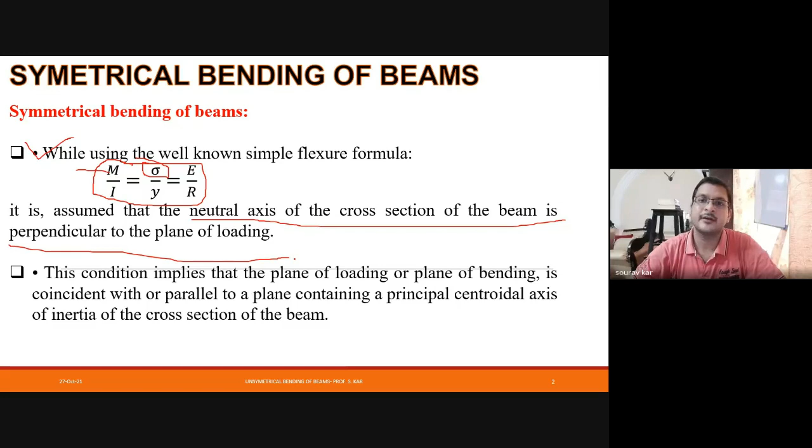If we have a rectangular beam, the neutral axis passes through the mid section of the cross section, and if the neutral axis is horizontal, then vertically, transversely, the loading is acting. In this condition, the bending equation is applicable, and when this bending equation is applicable, it is known as symmetrical bending.

That is which normally we have learned till date is symmetrical bending.

See the second point, this condition implies that the plane of loading or plane of bending is coincident with or parallel to a plane containing the principal centroidal axis.

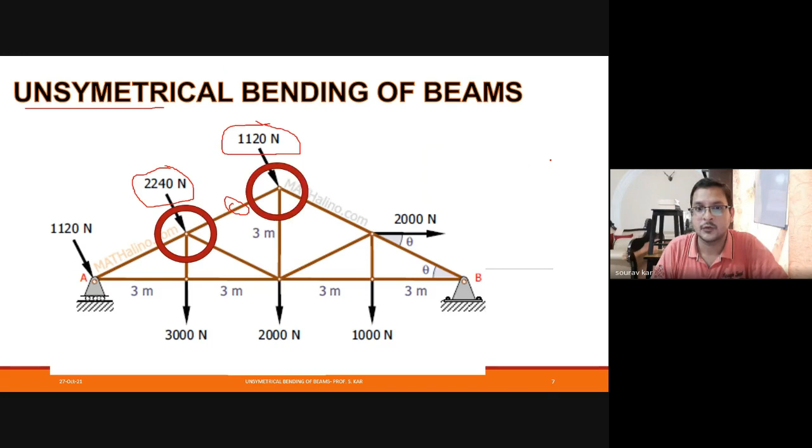So before coming to the statement, let us learn this thing, then we will come to the board. Unsymmetrical bending—what is the statement? For symmetrical bending, the plane of loading or plane of bending is either parallel or coincident with the x and y axis.

In unsymmetrical bending, just the opposite happens: the plane of loading or the plane of bending does not lie parallel to a plane that contains the principal centroidal axis of the cross section. Then the bending is called unsymmetrical bending. Another point: the direction of neutral axis is not perpendicular to the plane of bending.

Now let me come to the whiteboard. Let us learn the two statements, that is, the reasons for unsymmetrical bending. There are two criteria where unsymmetrical bending can take place—very important as far as MCQs are concerned. First, the section is symmetrical.

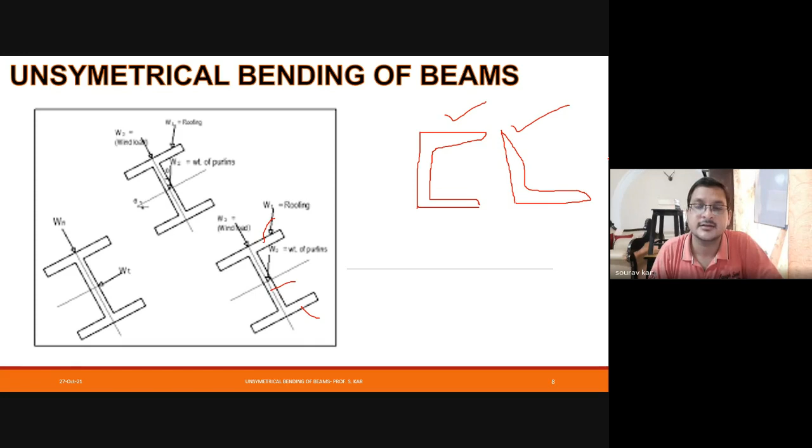So in all these cases, when the sections are unsymmetrical—if the load line is along the centroidal axis, meaning the load falls along x-axis and y-axis, but the section is unsymmetrical—then unsymmetrical bending takes place. So two important cases: the section is symmetrical but the load is coming inclined, then unsymmetrical bending occurs; or the section is unsymmetrical, like angle or channel section, and the load line is along any centroidal axis.

We will come to these diagrams later on. So these are the main criteria for unsymmetrical bending of beams. Now this chapter demands the basic idea to find out moment of inertia. Let us come to the whiteboard. Again, if required, I will come to the PPT.

Okay. It is very, very difficult to take online class also nowadays. Okay, is the board visible? Board visible, so? Yes. Sometimes when I will ask you, you have to respond. Okay.

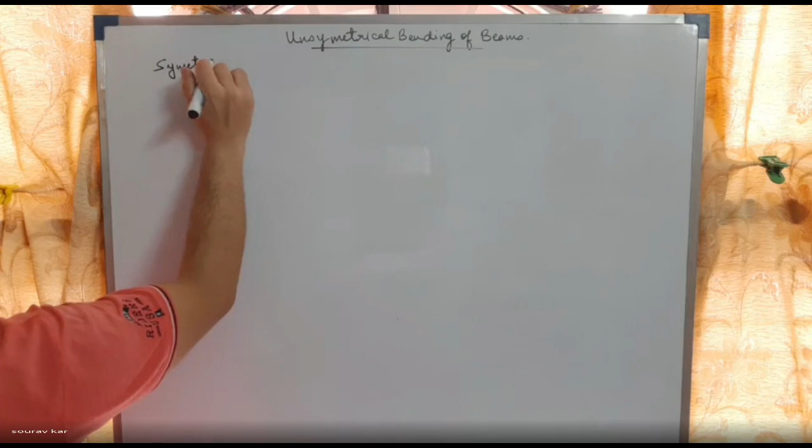So coming to this thing, unsymmetrical bending of beams. So we started, as I told you, there are two cases, symmetrical and unsymmetrical. I talked about the statements. Now I will show you in the figure how it is applicable, or what is the physical significance. Whatever I have discussed, that is in the statement form. Symmetrical and unsymmetrical bending. Okay. Now, what is happening?

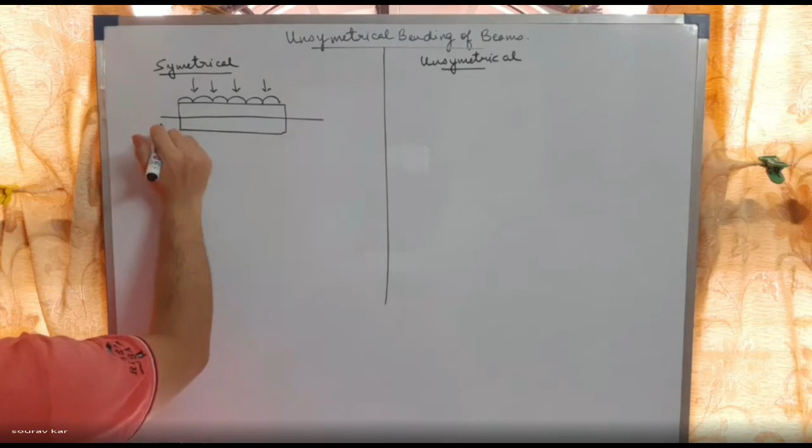For example, I told you the loading is acting transversely in this direction. For example, I have UDL or point load, something like this. Any sort of loading is there, and this loading is vertical loading, or you can say transverse loading. And I told you this is the neutral axis. What is neutral axis? Neutral axis is the layer of fiber where the compressive stress and tensile stress is zero. It is the location. So that is the neutral axis.

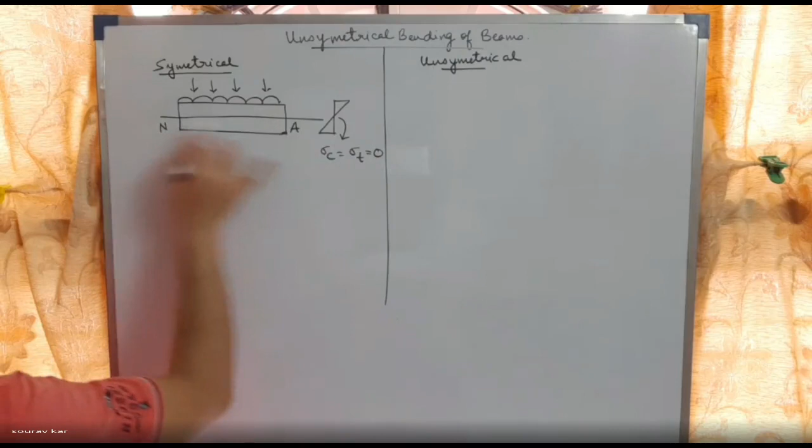Either the neutral axis lies or the neutral axis is perpendicular. First statement, the neutral axis is perpendicular to the loading, right? Second thing, that is the plane of loading. The plane of loading is parallel. For example, it is x axis and it is y axis. So the plane of loading is parallel to or coincident, means it is matching with this axis. That is, the plane of loading is parallel to x axis here.

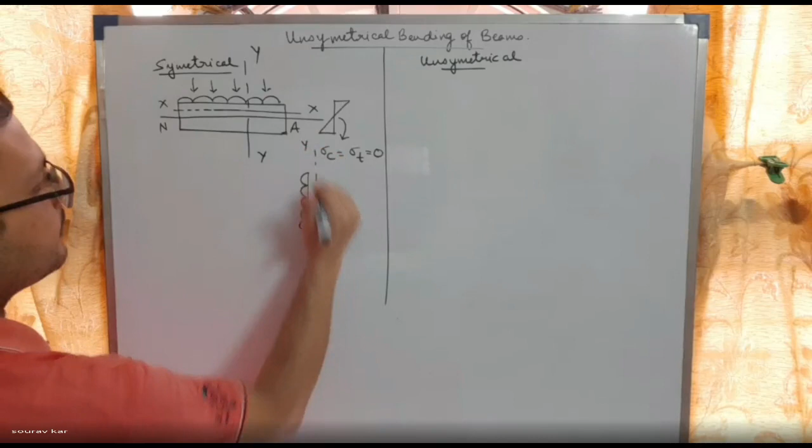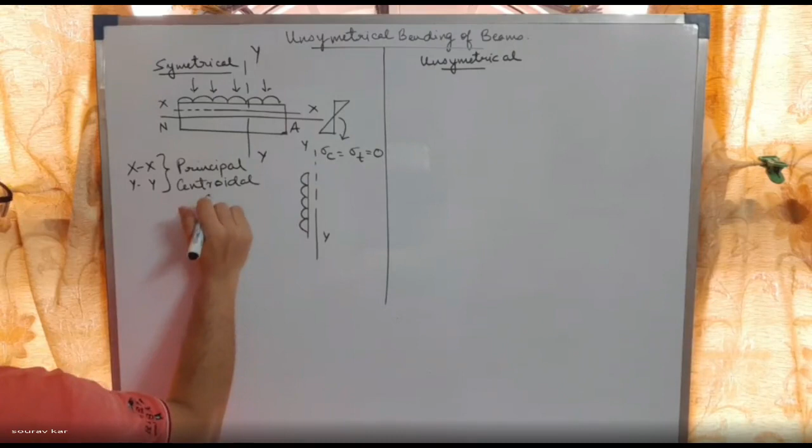For example, I have a beam like this and I have a loading like this. This plane is parallel to y axis. So here the plane of loading is parallel to x axis, and here the loading is parallel to y axis. So in symmetrical bending, the plane of loading is either coincident, matching completely, or parallel to x and y axis. So x axis and y axis are principal centroidal axis. Very important. In normal case, it is a principal centroidal axis.

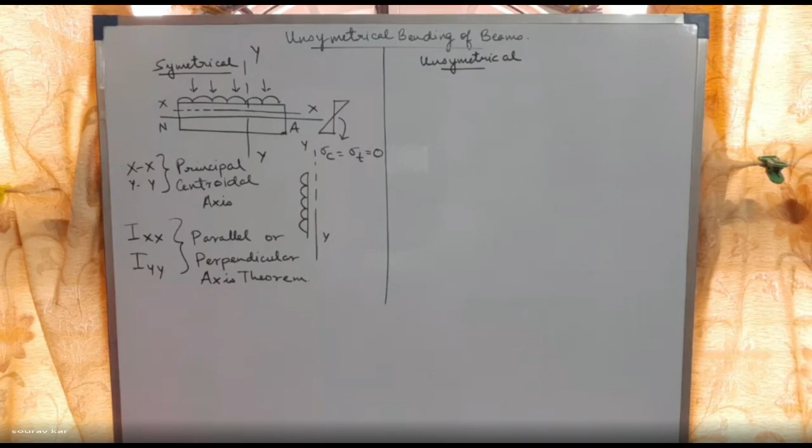Okay. Now, if someone asks me how to find out IXX and IYY, we use the principle of parallel or perpendicular axis theorem. Okay. And what is IXY? IXY is product of moment of inertia.

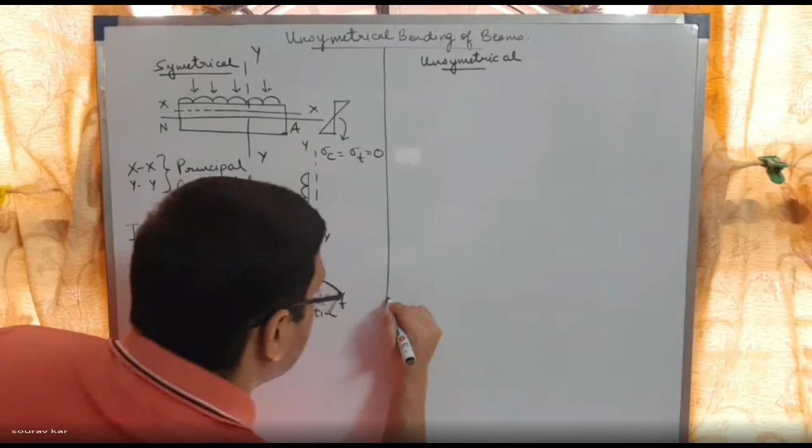So IXX is the principal moment of inertia about x axis. IYY principal moment of inertia about y axis. IXY product of moment of inertia. So these are the basic things which we have learned in symmetrical bending. Now come to this side again. How we used to find out for parallel axis theorem. For example, this is my x and y axis, and I have a body. Any body, for example, this.

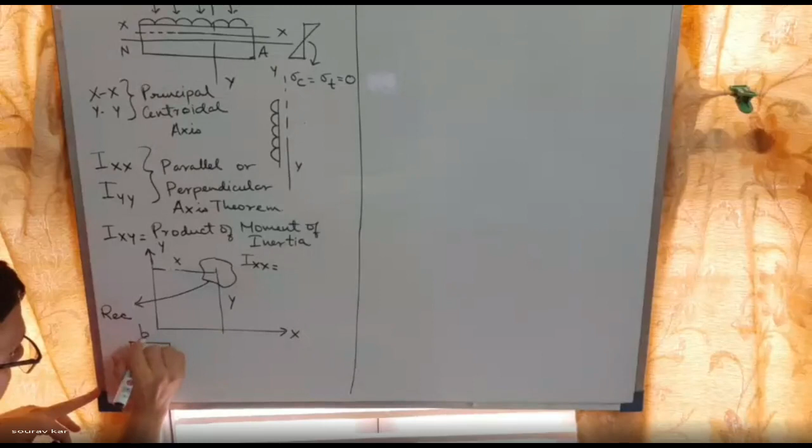If I have compound body, means which consists of two different bodies, it is attachment or superposition of two different bodies. Now, for example, I have a body. The location with respect to y axis, let us take x, and location with respect to x axis, let us take y. Distance from the centroid. So what is big IXX? For example, this body is rectangular. Width of the body B and depth is D. Let me take simple part.

So what will be this moment of inertia with respect to x axis? Now see, only calculating the moment of inertia of a single body, that means just a rectangle or triangle or circle, the moment of inertia for simple diagrams is given in the chart. In strength of material books, you can find it. But if you have compound body, that means a combination of two rectangles, three rectangles like this, then we have to apply parallel axis theorem.

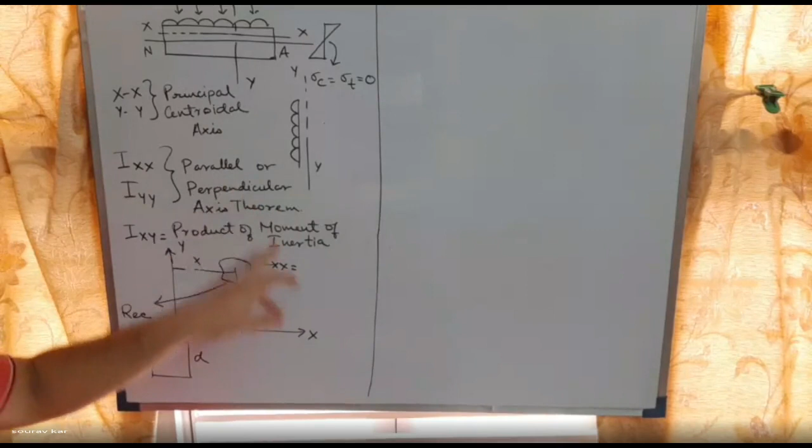Mainly we apply parallel axis theorem. It is easy to apply. That is why we apply parallel axis theorem. So what will be the formula for parallel axis theorem with respect to x axis, because we are calculating moment of inertia about x? So it is b, and d is the depth. So the basic formula is normal moment of inertia about xx plus area into distance square. Area into distance square. Okay.

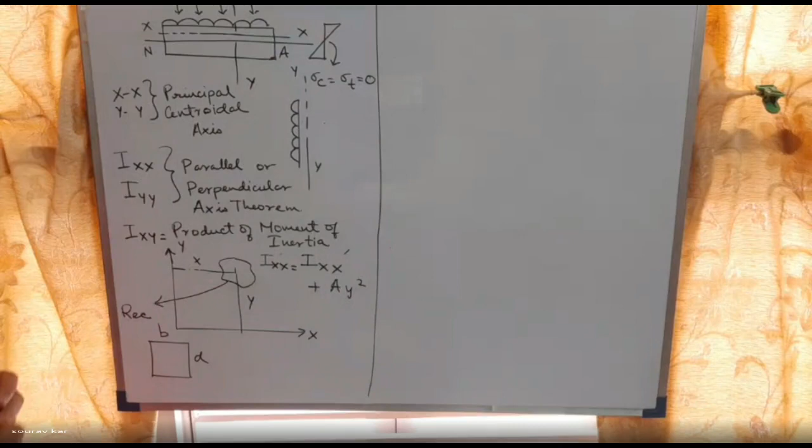That means, for example, let me take this body, and this body, like this. So I have three different rectangles. So the moment of inertia of one particular body will be the moment of inertia of individual body plus the area multiplied with the centroidal distance square. So this will be for Ixx, and similarly for Iyy, this will be moment of inertia about y axis plus A into x square.

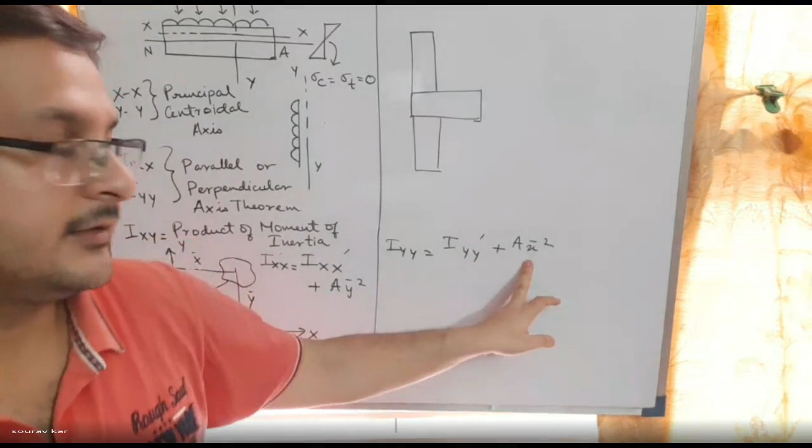So please remember this. Everyone knows it, but the second term everyone feels difficult. Moment of inertia with respect to any axis: area multiplied with the distance between the CGs. So here x bar, that means distance from x. So if you want to find out Iyy, that is the original moment of inertia of the body plus area multiplied with the distance between two CGs, CG of the whole body and CG of the individual body. When I do the problem, you will better understand.

So please everyone make sure to at least remember three moments of inertia: the moment of inertia of rectangle, circle and triangle. Three basic figures you have to remember for lifelong. So BD cube by 12. For example, let me take a rectangle. So it is x axis. So moment of inertia about x axis is B into D cube by 12.

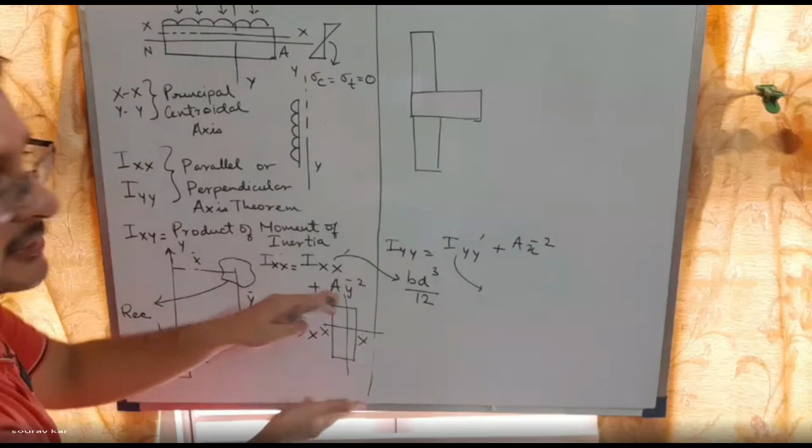If I take it along y axis, B will become D. So x axis is horizontal, B into D cube by 12. When you take it about y axis, because y axis is perpendicular, just change your face. So B becomes D, D becomes B. So DB cube by 12. This is the basic moment of inertia of individual bodies. Always remember. So this is how we find out Ixx, Iyy, and how to find out Ixy I will show. These are the things which we have learned in symmetrical bending. Now coming to unsymmetrical.

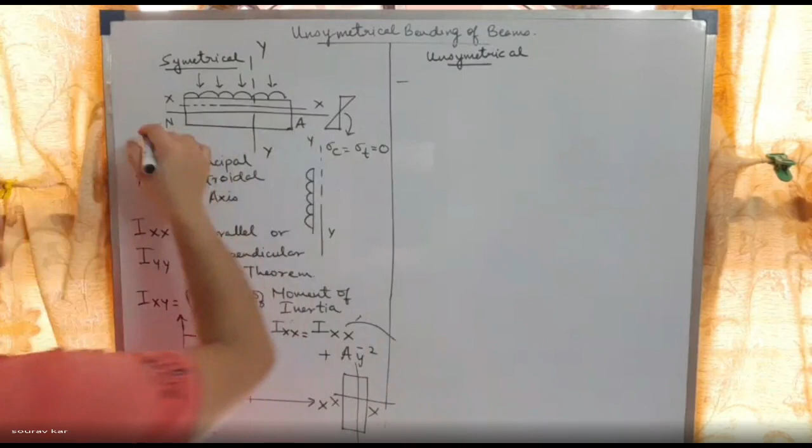In unsymmetrical bending, I already told you that the plane of loading does not coincide. So, for example, I have an inclined plane and I have a body like this. So, what will happen? These are x and y, the principal axes. Now, two things can occur.

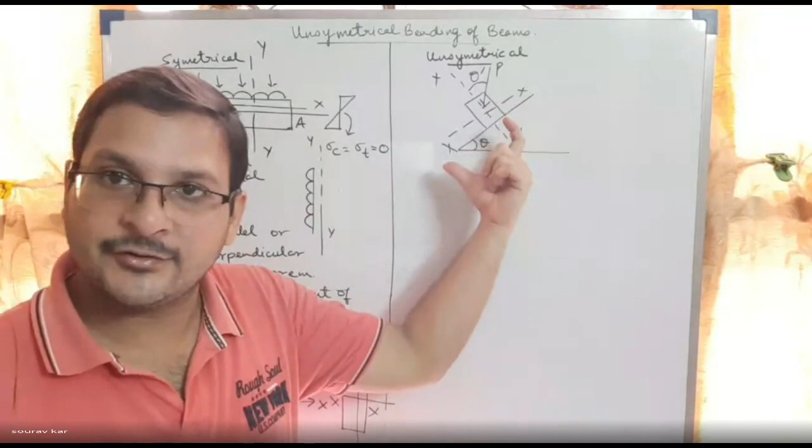Either the body is symmetrical and the loading is applied at an inclined angle, for example, some angle theta. This is one case. The body is symmetrical, even if the body is inclined, no problem, or the body is lying horizontal. Then also, if the loading is inclined, we will have unsymmetrical bending. Or the body is not symmetrical, like this, an angle section.

Then also, for example, the bodies along this direction, the body is either parallel or coincident with x and y axis also. Due to this, it is unsymmetrical about x and y, no symmetry. Then it will undergo unsymmetrical bending.

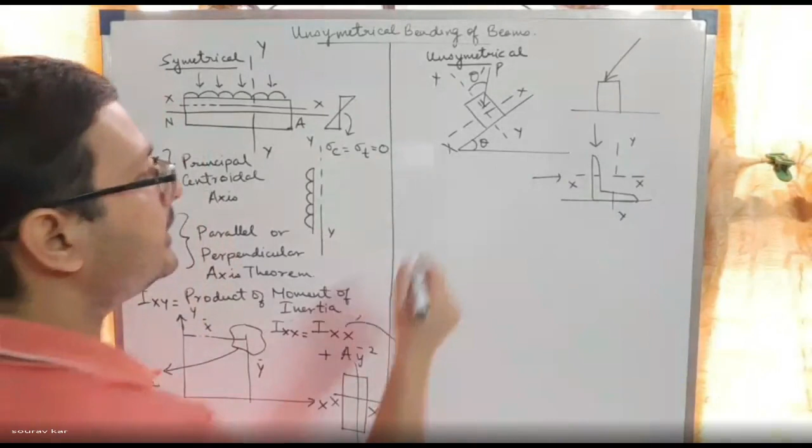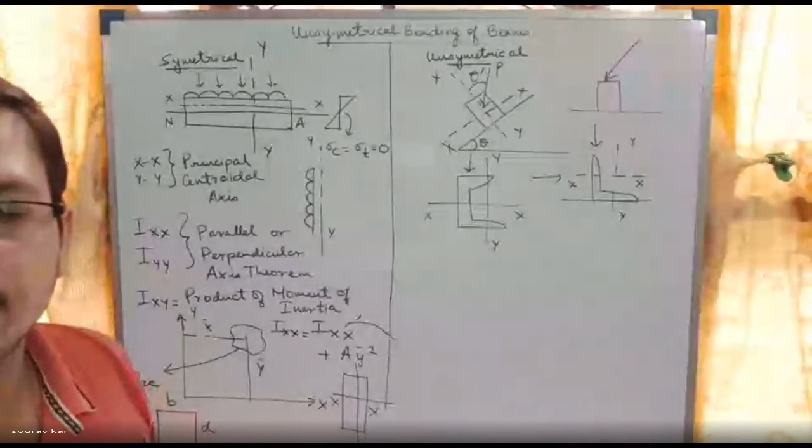Similarly, if you take a channel section, y and x, it is having symmetry about x axis, but is it having symmetry about y axis? No, it is a mirror image about x axis, not about y axis, right? So whatever the loading, it will undergo unsymmetrical bending.

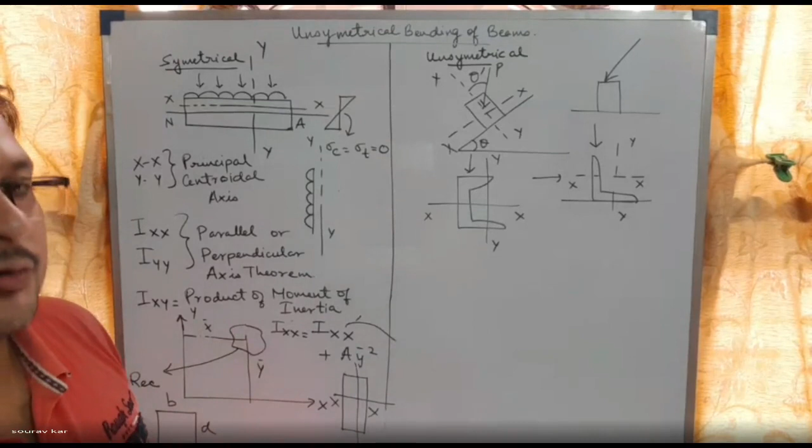So two important cases: the body is symmetrical and the load line is inclined, or the body is unsymmetrical and the load line is parallel or coincident with the two principal axes, x and y. So this is the difference between symmetrical and unsymmetrical, and also in the unsymmetrical case, the neutral axis is not perpendicular to the plane of load. This is a fundamental thing.

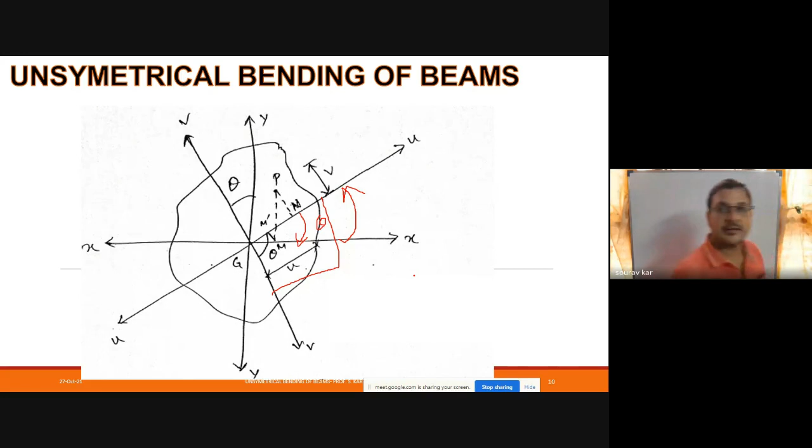Now please write down: due to unsymmetrical bending, two original principal axes. The word original is not in the book, if you check, but for your understanding I am making you write it down. Okay, just wait a minute.

Everyone, the West Bengal government has announced that college will open, but we are not sure. I have talked with many faculty members in the college and outside. We don't know actually what will happen. So please, in whatever form the class takes place, do not miss the class. At least properly attend my class.

Okay, so the two original principal axes, that is xx and yy, are converted: xx is converted to uu and yy is converted to vv at angle theta. The angle theta is calculated anti-clockwise.

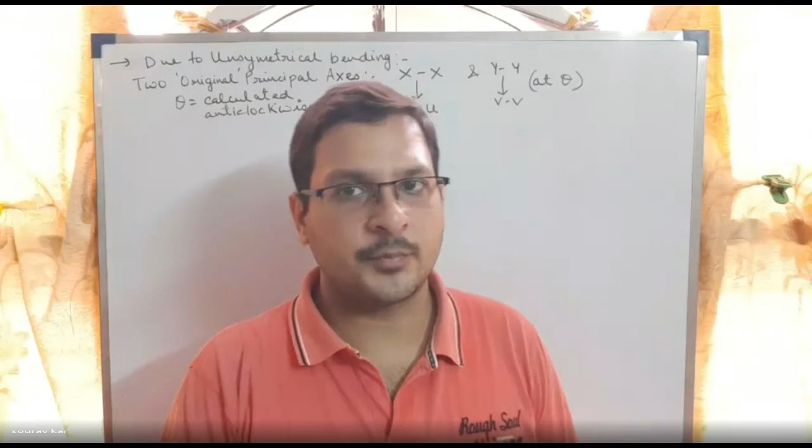So xx converts to uu, therefore we can write IXX has turned into IUU and IYY has converted to IVV. So what is the formula for the new principal moment of inertia? What is the equation for IUU?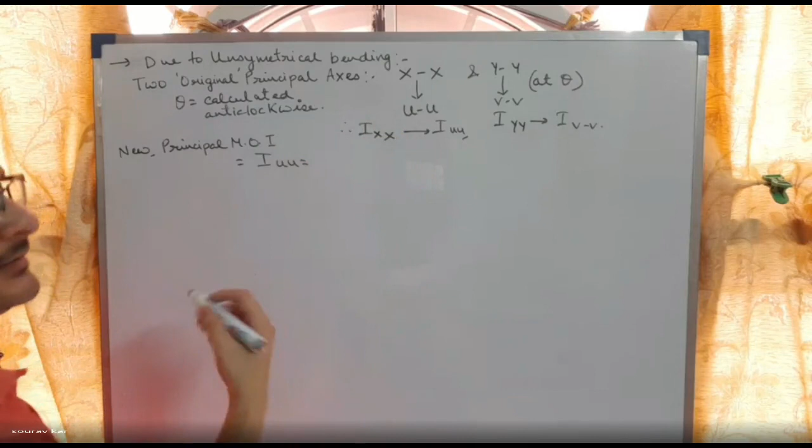Please write down. First, for a particular body, whether symmetrical or unsymmetrical, we have to calculate IXX and IYY first. I will tell you when I solve a problem; we will solve it step by step. Do not just think, oh my God, this is a huge problem we have to solve. No. Always divide a large problem into steps. This will help you to excel in the exam. Okay.

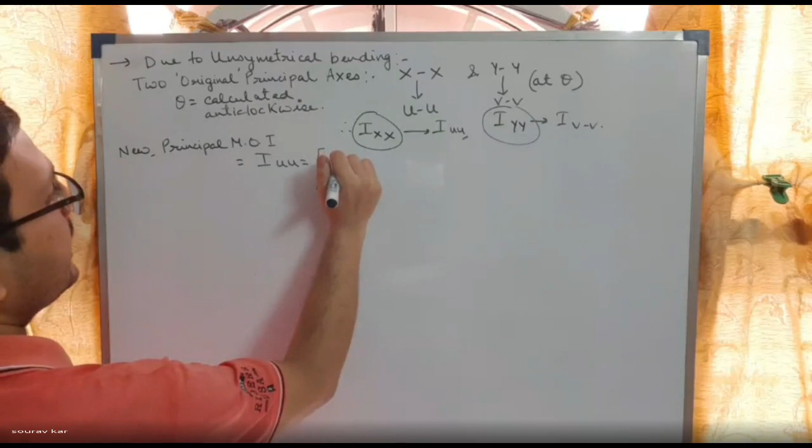So principal moment of inertia IUU will be, so I told you we have to know IXX and IYY. So the equation of IUU will be somewhat similar. Please make sure, this equation is somewhat similar to, have you learned principal stress and strain in strength of materials? Yes or no? Yes, sir. Yes, sir. These equations are somewhat similar. The pattern is somewhat similar to principal stress and strain.

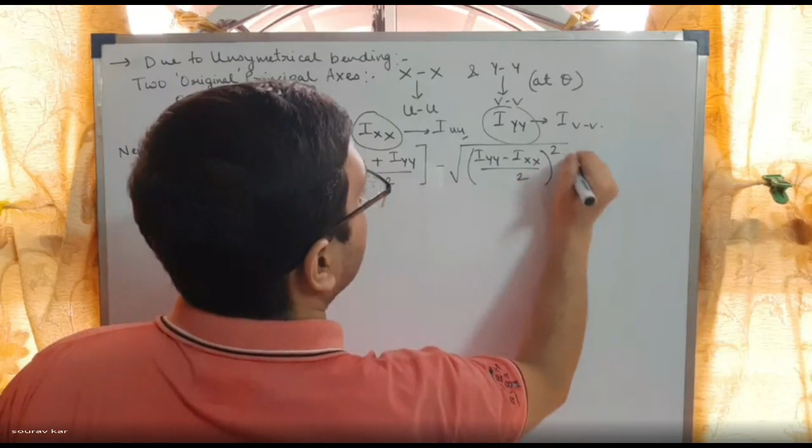Okay. So IUU is IXX plus IYY by 2. Write it down. IXX plus IYY by 2 minus root over of IYY minus IXX by 2 whole square plus IXY square. That IXY is the product of moment of inertia.

IXX and IYY, for example, if I say the moment of inertia of XX is greater than moment of inertia of YY, then XX will be the major axis. Okay, major axis, minor axis. If the moment of inertia about XX is more than moment of inertia of YY, then XX is the major axis, YY is the minor axis. But it can also happen vice versa, no problem. But this formula we have to remember.

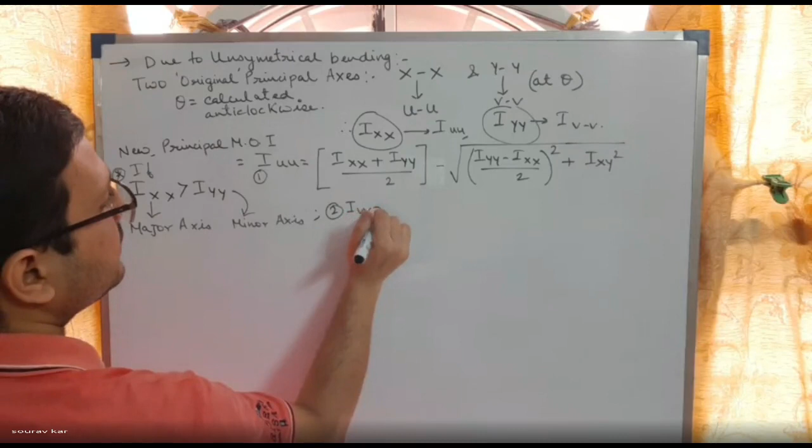Okay. The first is minus, so this is the first equation, IUU. Then we have another equation, IVV. The whole equation remains same. The minus turns into plus. So IXX plus IYY by 2 plus root over of IYY minus IXX by 2 whole square plus IXY square. Now these are the two equations, the two new principal moments of inertia.

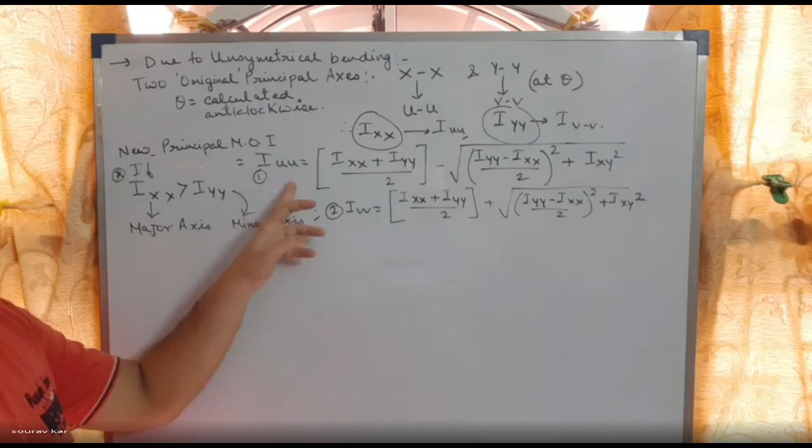Achha. One thing very important, you can remember just only one equation. Why? There's a trick. Instead of remembering two big formulas, you can remember any one of the equations, because there is a trick for this. Write down. Trick. The trick is for any symmetrical or unsymmetrical bending,

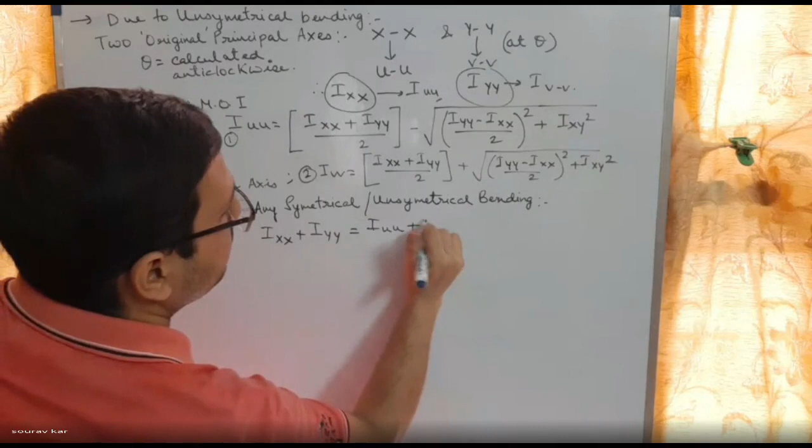for any symmetrical or unsymmetrical body, IXX plus IYY, the sum of two mutually perpendicular moments of inertia, or the sum of the moment of inertia about two mutually perpendicular axes, is always constant. So IXX plus IYY, the sum should always be the same. This equation is universally true.

It's always true. So IXX plus IYY will be equal to IUU plus IVV. Very, very important. If you remember one equation for IUU, we have to calculate IXX and IYY by default, right? So this we have to equate. If you know only one equation, the other unknown will be available. So you don't have to remember two equations.

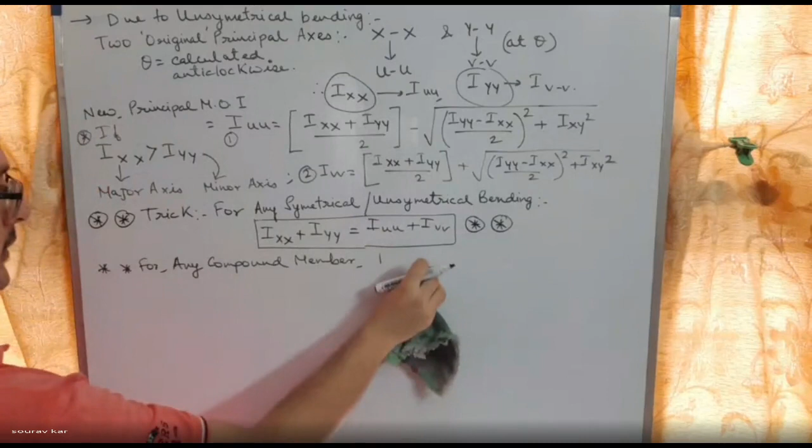Another trick is there, very important regarding this thing. Please remember, for a symmetrical member, let me write it this way. Very important, for any compound member. Compound member means there is more than one member, more than one diagram. For any compound member, write down, for any individual symmetrical member,

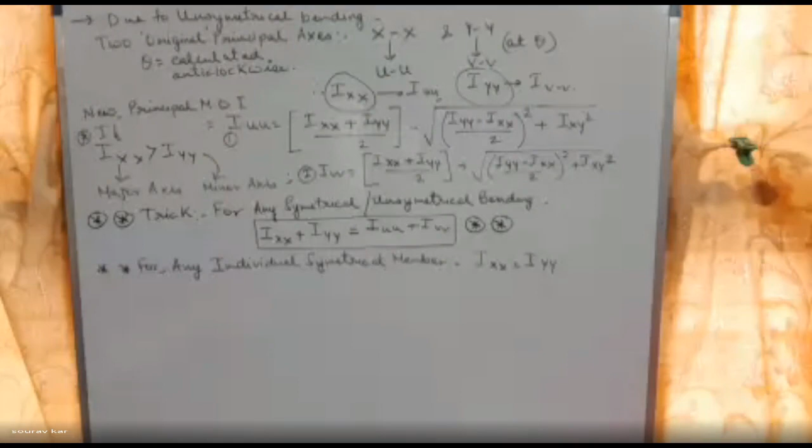the moment of inertia about xx will be equal to the moment of inertia about the y axis. Just wait because it is turning hazy. Yes.

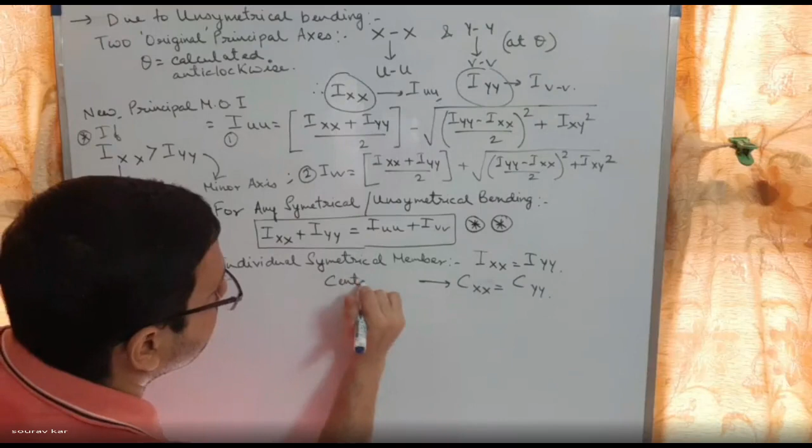So for any individual symmetrical member, for example, rectangular section or circular section, the moment of inertia about xx will always be equal to yy, and also the CG distance about the xx axis will be equal to the CG distance about yy. Cxx and Cyy are the centroidal distances. Right? For a symmetrical member, IXX and IYY will be same, and the centroidal distance will be same.

This is obviously for symmetrical. For individual symmetrical, please erase the symmetrical. For any individual or for any equal angle section, please write down: for any equal angle section, this is applicable. IXX equals to IYY and CXX equals to CYY.

Equal angle section meaning: if we have this angle shape, this L shape, these are the legs of the angle section, known as legs of angle section. So if these lengths are same, L1, L2...

L1, L2, these are the legs, the edges. If the edges are same, then it will have an equal angle section. If they are not same, it is called unequal angle section. If L1 not equals to L2, it is called unequal angle section.

Sir, can you repeat that because the voice is breaking? Yeah, I know, because the net is also very unstable. I can see this also. Just a minute, let it get fixed. Sometimes this is the main problem in online class, sometimes the net becomes very fluctuating. I can see I have connected to laptop and cell phone both, so I can see in the laptop it is fluctuating.

So see here, is it audible now? What I want to tell is this is an angle section. If you see the angle, it is L section, known as angle section. Or if we have this channel section, C section, it is the extension of angle section. So if the sides, if the dimensions of the length are same, it is called equal angle section.

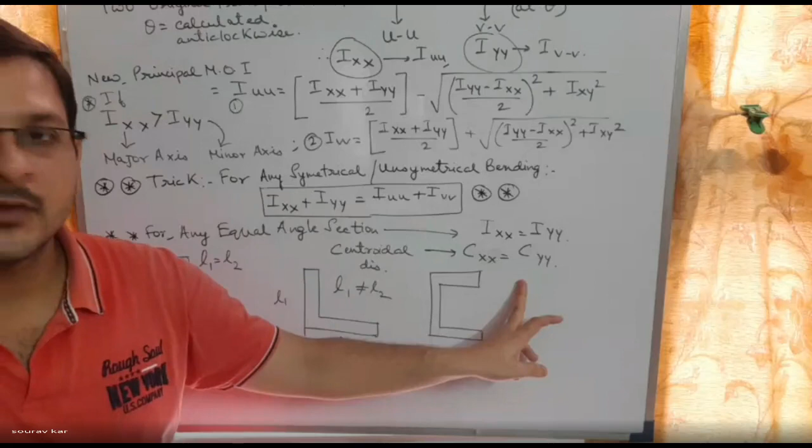And for equal angles, this is applicable. This is a shortcut, a trick, it will save you time. You don't have to separately calculate IXX, IYY, or calculate the CG distance with respect to XX axis and YY axis. So these are the tricks, it will save you time. For the equal angle section, if the sides are same, it is equal angle section. If the sides are different, it is called unequal angle section. You will get numericals on this.

Have you understood, all of you? Now, coming again to the PPT because I will show the diagram, these are the basic equations. Whenever we will solve problems, we have to follow this first.

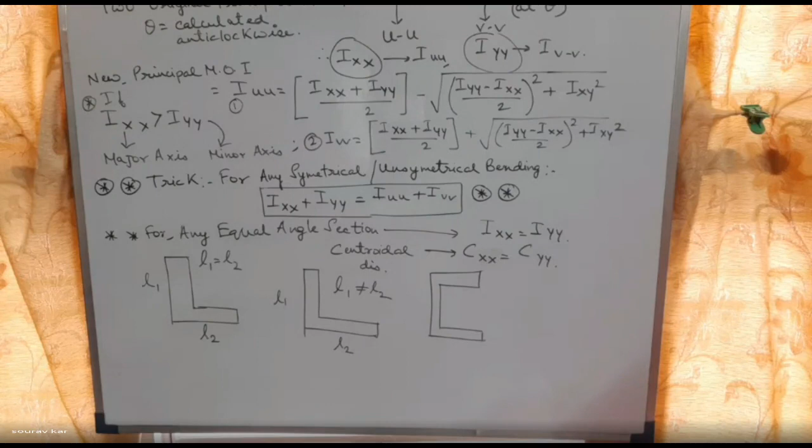Now the same diagram I'm sharing again. The first thing is the basic thing which we have learned, calculation of IUU and IVV, that is the new set of principal moment of inertia. Now the second stage is we are interested to find out the bending stresses at this point P. You can see this point P. So we are interested, on this diagram particularly, to calculate the bending stress at this point P.

That is the diagram for this, if we are interested to find out the bending stress. Please draw this diagram, the similar diagram here. We have the bending moment. Please draw this diagram, then I will explain what is happening in it.

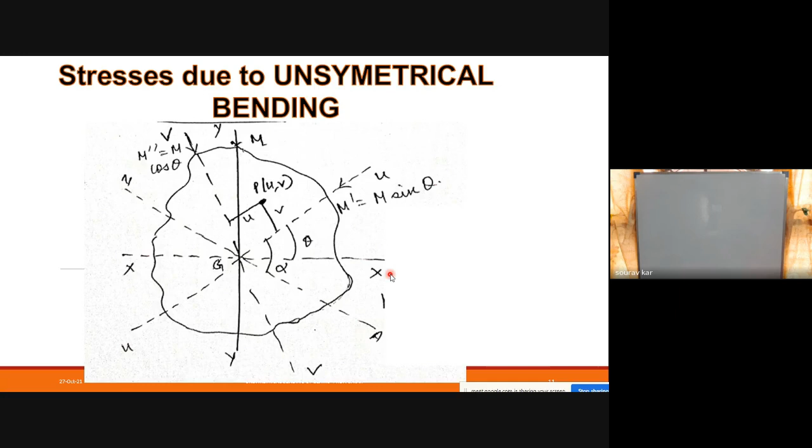So obviously, if someone tells you to find the bending stress at the neutral axis, then the bending stress will be 0. So the bending stress at this line will be 0, and other than the neutral axis, the bending stress will have some value. Okay, so this is the equation.

Are you all writing it down? Please write it down. The bending stress at point P: here we need the maximum bending moment M, the coordinates of U and V, and the other parameters.

So these equations will be used to find out the solution.

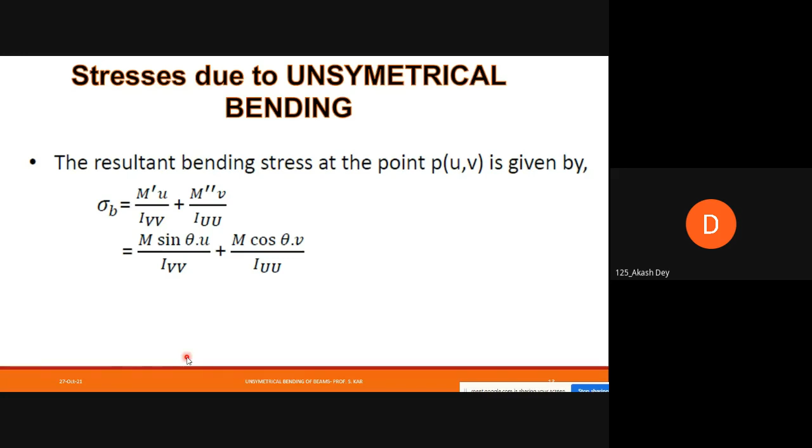Yes, sir. So now coming to the first problem, the first type of problem. The diagram is there, I will show the diagram, but before that, write this problem.

The question is: determine the centroidal principal moment of inertia of the equal angle section 30 mm by 30 mm by 10 mm. That is, they've asked me to find out the principal moment of inertia. That means here we will not only calculate IXX, IYY, but also IUU and IVV, all these things, and also the angle of inclination.

Angle of inclination, tan theta. The equation for the angle of inclination is given here, but I have not written it, so I will write it on the whiteboard. That is tan theta. Sometimes we have to find out the angle of inclination, theta, so that also we have to find out.

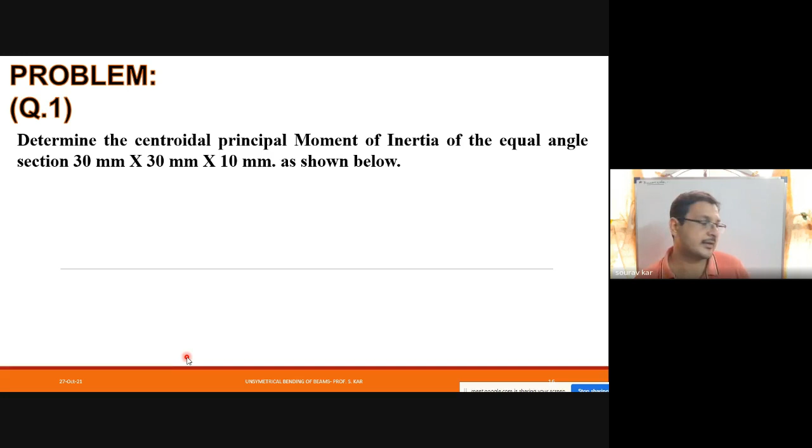So here is the equal angle section. The sides are 30 mm, 30 mm, and the thickness is 10 mm. This is the diagram.

So the sides, if you see, it's the angle section, L shape. The thickness is 10 mm each. G1, G2 are the two CG distances or CG points of these two different bodies. There are two rectangular sections, one horizontal, another vertical. So G1 and G2 are the two different CG points.

Sometimes the CG points will be given in the question, or sometimes we have to find them out. So 30 mm, 30 mm vertical side and horizontal sides. XX and YY are the principal axes.

CXX, if you see, is the centroidal distance between the original XX axis and the X axis of the lower edge. So CXX and CYY. CXX is the centroidal distance of CG from the XX axis, and CYY is the CG distance from the YY axis. Here, in this diagram, you will get it.

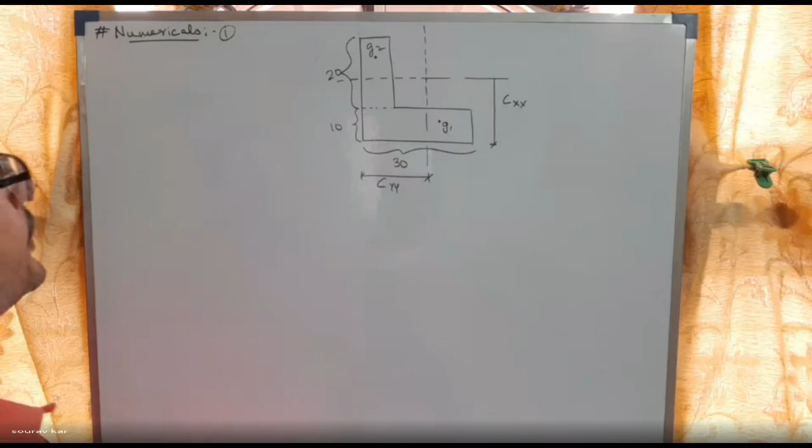So here we have to find out the various items: IXX, IYY, then CXX, CYY. Then we have to find out IUU, the principal moment of inertia, all these things, and also angle theta. We have to find out all these things. So this question will be of 6 marks.

So now, the edges are 30 mm and 30 mm. So I have divided this body into two different bodies, body 1 and body 2, because until we divide this body, we will not be able to understand this. And G1, G2 are the two CGs, already located. So G, we will take the centroid, the point of CG, as the origin.

Now for these diagrams, for these numericals in this chapter, you have to imagine this figure is located in a graph paper. The CG is the origin, 0,0. First quadrant, second quadrant, third quadrant, and fourth quadrant.

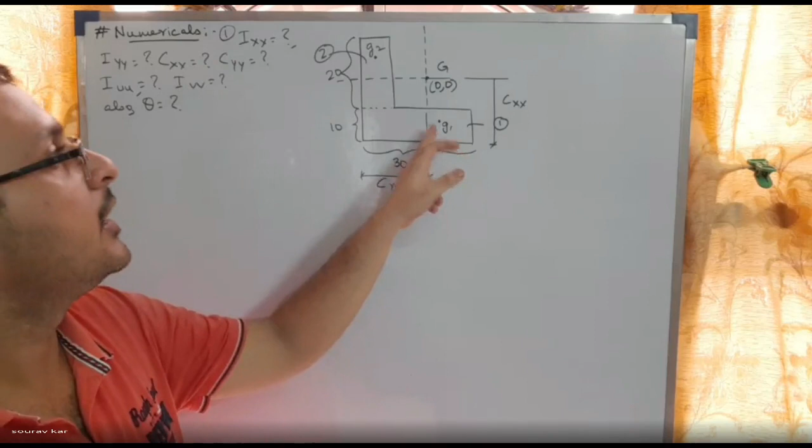So G1 is located in the fourth quadrant, G2 is located in the second quadrant. Many times we have to write down G1, G2. G1 is the CG of body 1, and its location is given here as 4, -6. G2 is the CG of body 2, given as -6, 9.

So G1, you can see, x coordinate positive, y coordinate negative, fourth quadrant, so 4, -6. And here, second quadrant, x negative, y positive, so -6, 9. It is given in the question; sometimes you have to find it out also, then I will show you. The first solution, let us start.

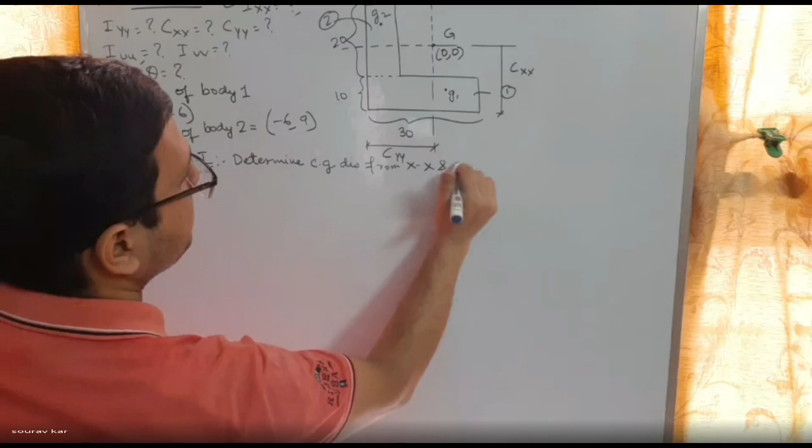Okay, so now see here. First is step 1. So first we have to calculate the CXX and CYY, that is, determine the CG distance from XX and YY axis. Okay, we will determine this. Determine CG distance from XX and YY axis. So first we will calculate CXX and CYY.

Okay, CXX. This we have to find out first. So what is CXX? It is the CG distance of the whole body. See, this capital G point, let me make the screen up. This G point is not just the CG of this body or this body. It is the CG of the total compound body. Okay, so we have to find the location of this G, taking this as origin for this body at this base edge.

Please tell Abhishek Kumar not to join. Roll number 107 is disturbing me.

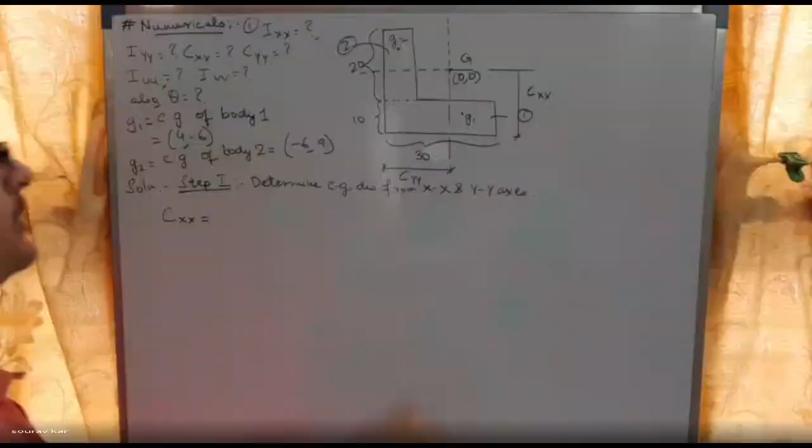So CXX and CYY, we have to find out this location of CG. So what will be the formula? Now to find out the CG along CXX, see here. CXX is in vertical direction, right? CXX is in vertical direction. See here. So A1x1 plus A2x2. We will take two diagrams.

So what we learned in centroids also to find out CG along y direction, we used to find out A1y1 plus A2y2 plus something like this, whole divided by sum of the areas. So we take the moment of the areas to find out this CG distance of the total body along y-axis. This formula we have learned in strength of materials. Here also we have to find out CG distance in y-y direction. Why am I replacing the axis? Because these are the distances between two parallel x-axes, but it is in vertical direction.

Okay. So obviously a1 x1 plus a2 x2. Here two diagrams are there. Divided by a1 plus a2. a1 x1 plus a2 x2 by a1 plus a2. Okay. Now see a1 x1. First, a1 is what? This figure is a1. This figure is a2. I have divided this figure for your understanding. So a1 is the area of this diagram.

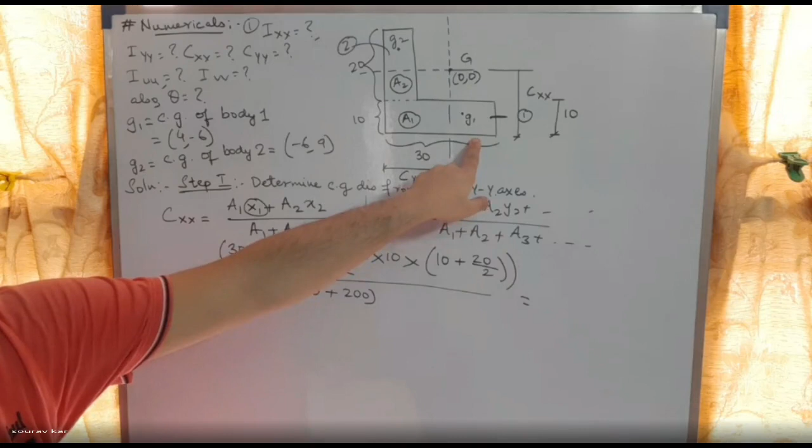So we are calculating this distance from the base, from this edge. All of you please mark it. CXX, from base to top. So for this body, from base to this, we are taking only this body, half distance of 10, 10 by 2. For this body, I have to find out this distance. So 10 plus 20 by 2. Sir, CXX is 11, sir. Correct. CXX is 11 mm. Very good.

Now, as I told you, for equal angle section, you can write down, CYY and CXX will be both same. But we know this because we have learned that trick. But this is the first diagram, so let us calculate. Let me show you it is coming same. In exam time, you will just do this if it is equal angle section. So CYY, let us calculate and see that it comes the same as CXX.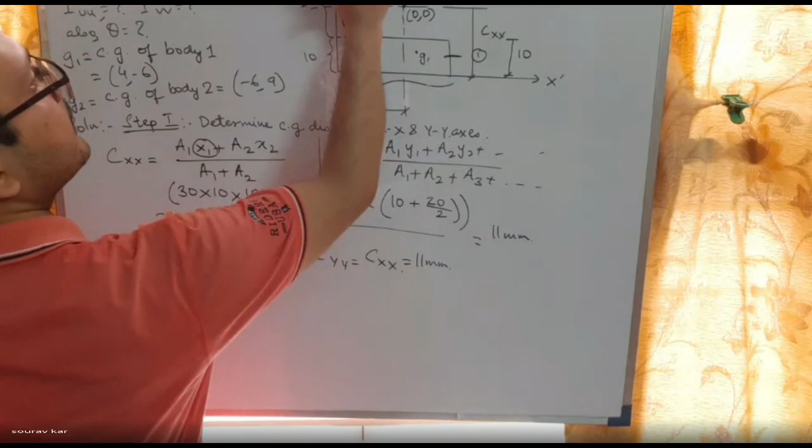So here also, A1, Y1. So CYY is the CG distance from this Y axis. This is X1. This is Y1. Okay. So CG distance, CYY is CG distance from this edge, from the left side edge. So A1 Y1 plus A2 Y2 by A1 plus A2. Okay. So A1 Y1.

So for this same body A1, 30 into 10. So now we have to calculate distance from this edge. From this edge, this body will be 30 by 2, plus 30 into 10 into 30 by 2, plus this body A2, 20 into 10. Oh, sorry. Here it's 30 by 2. Sorry, here we have to subtract this part because this thickness is there. So 30 minus 10 by 2 for body 1. So this is the Y1 distance for body 1.

This distance, 30 length, 10 thickness, into 30. Within this 30 we have this body, so we have to subtract this. So 30 minus 10 by 2, plus 20 into 10 into 10 by 2, whole divided by 500, 300 plus 200. So here it is coming 11 mm. Cx is coming 11 mm.

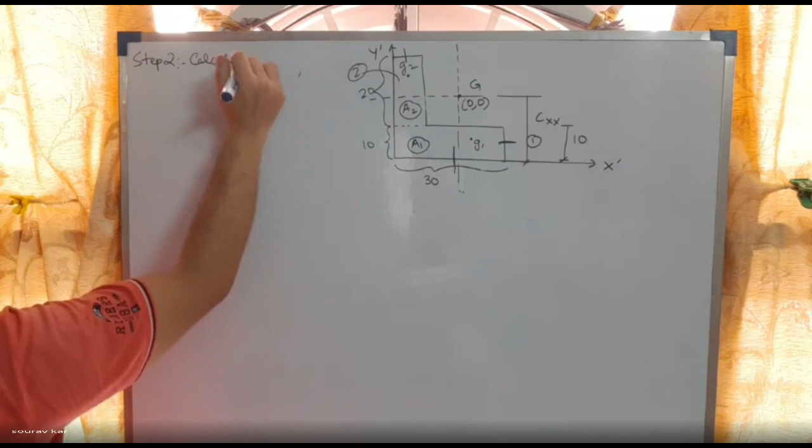Okay, so first is IXX, moment of inertia about XX. Moment of inertia of the total body, IX means moment of inertia of the total body; write it down, then you will understand later. Moment of inertia of total body of body 1 and 2, body 1 plus body 2. Okay, total moment of inertia of body 1 and body 2.

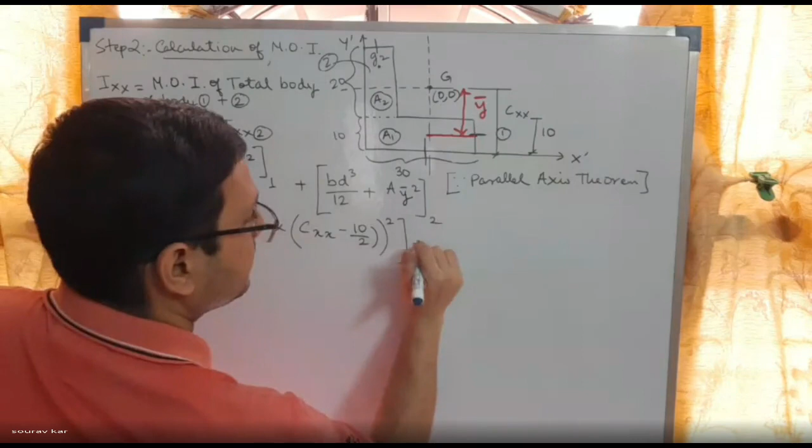So how much it will be: cxx is 11, so cxx minus 10 by 2 whole square. So bd cube by 12 plus a into y bar square, y bar is this gap, cg of the whole body minus cg of this body. Plus, now for body 2, bd cube by 12, b is 10, d is 20 because this part is already taken, we will take this part only, so bd cube by 12 plus a is 200.

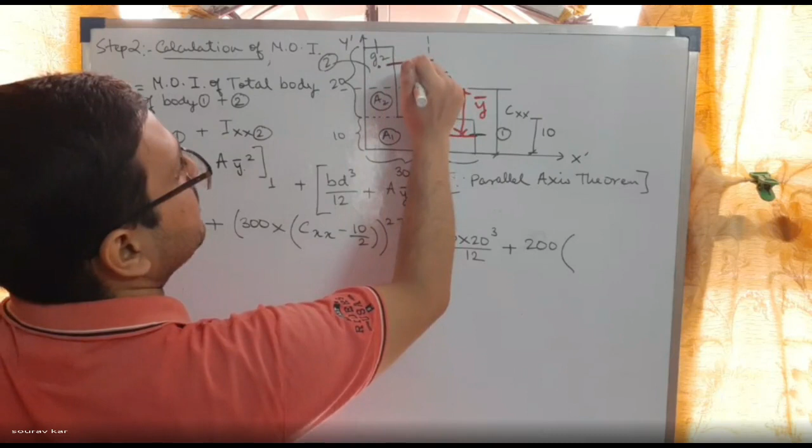Similarly here also, this is the y bar distance for this body, between cg of this body and cg of the whole body. Now cg of this body you can find out: 10 plus 20 by 2, because we are calculating from the base only. So this rectangular vertical body is 20/2 plus 10 mm minus CXX.

So we are calculating these distances in vertical direction. Very important, take time and calculate. First body 30, it will be a huge big number. Slowly calculate. One important trick: first you calculate the left part, then you calculate the right part. Then it will be easy for you.

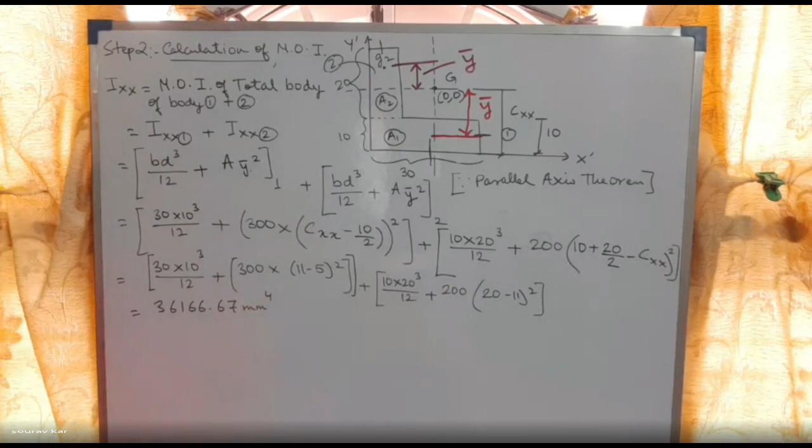Sir, 36,166.66 millimeter to the power 4. 36,166.67 millimeter, right. Always remember the unit of moment of inertia, many students forget this. The unit is mm to the power 4 or length to the power 4. If you feel, you can round off to 37,000 also.

During calculation, to make it easier, you can round off to a whole number or keep it same. Similarly IXX: for equal angle section, this will be same for IYY. To calculate IYY, we follow the same method only in x direction; these distances we calculated in y direction. So IXX and IYY will be same.

So now we will calculate step 3: calculation of IXY, IUU, IVV, and angle theta.

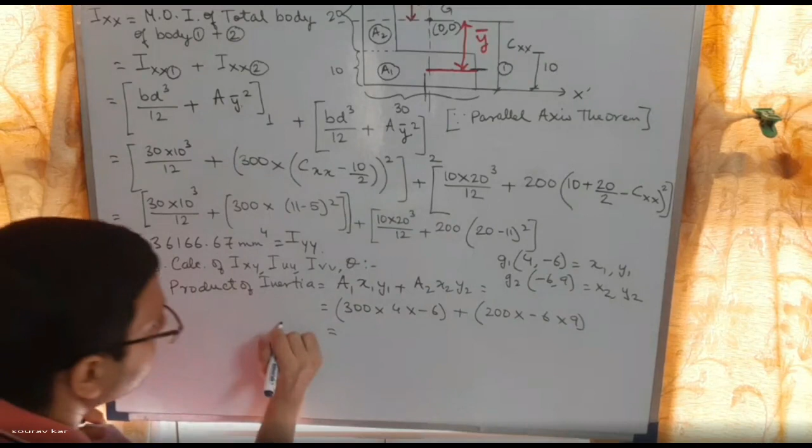Okay. That is the product of inertia. So we were multiplying area with respective body area into their coordinates. So for this thing, first body 300, 300 into 4 into minus. We have to take the sign also. So the product of inertia is IXY. The product of inertia A1 X1 Y1 plus A2 X2 Y2. So it is coming minus 18,000 millimeter to the power 4 IXY.

Okay. So now find out angle theta. See here, to find out the angle theta, angle of inclination, tan 2 theta is equals to 2 IXY by IYY minus IXX. Write this down, we have not written this. So 2 into minus 18,000 divided by IYY minus IXX. So the denominator is coming 0 since IYY equals IXX.

So it is indefinite because denominator is 0. So the answer cannot be found out. So therefore it is indefinite. This happens when 2 theta is 90 degree. So theta 1, the first angle, is 45 degree. Second angle is 90 plus 45, 135 degrees. There will be two angles.

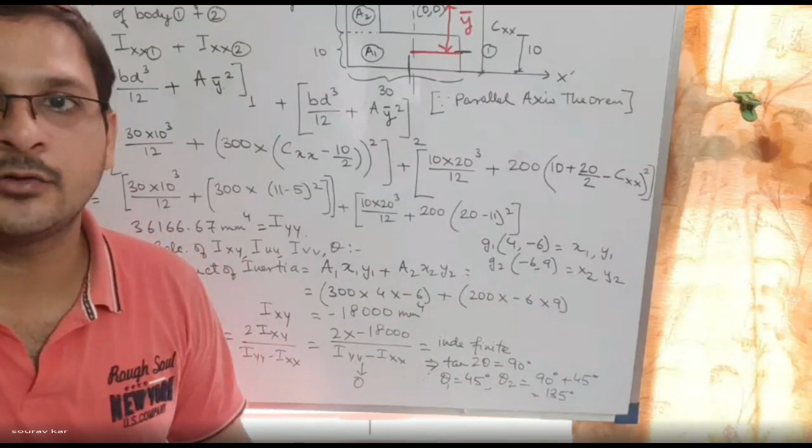One is the angle of inclination with UU, that is theta 1, 45, and the angle of inclination with VV. Okay, if these are two mutually perpendicular, যদি একটা 45 degree হলো আর একটা হবে 90 plus 45 because they are two mutually perpendicular, if I find the angle counterclockwise with respect to x-axis.

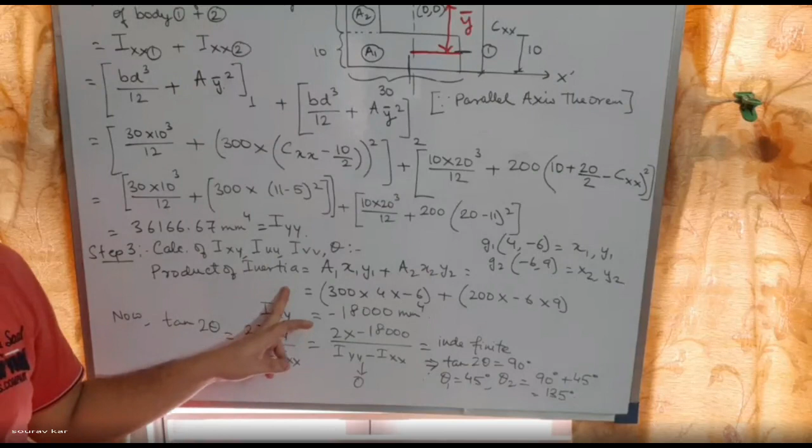So here we have found out the product of inertia IXY. I have found out the angle theta. There are two angles. If one angle is 45 with respect to x-axis, this is angle of inclination of UU, this is angle of inclination of VV. One is 45, another is 135. আর একটা বাকি আছে, that is calculation of IUU and IVV.

So therefore you just calculate IUU. So IXX plus IYY by 2 minus root of IXX minus IYY by 2 whole square plus IXY whole square. If you find out IUU, then you can find out IVV using this trick.

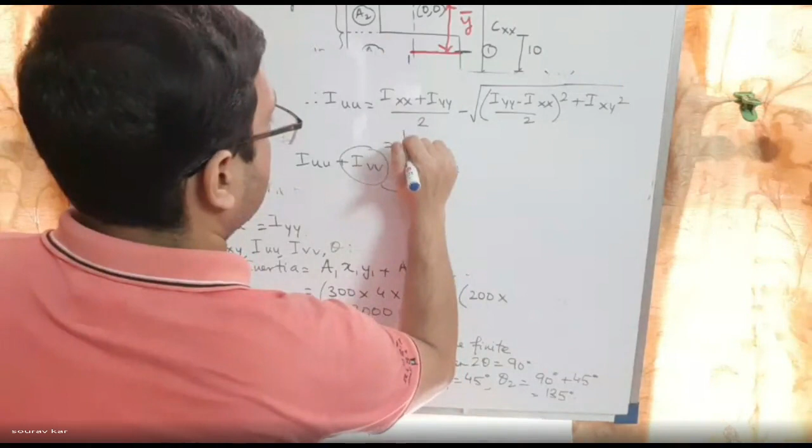So IUU is coming around 18167 mm to the power 4. So the principal moment of inertia IUU is 18167 and IVV is coming 54166, 54167. Just check this. You will get the answer. Copy this down, then I will take the attendance.